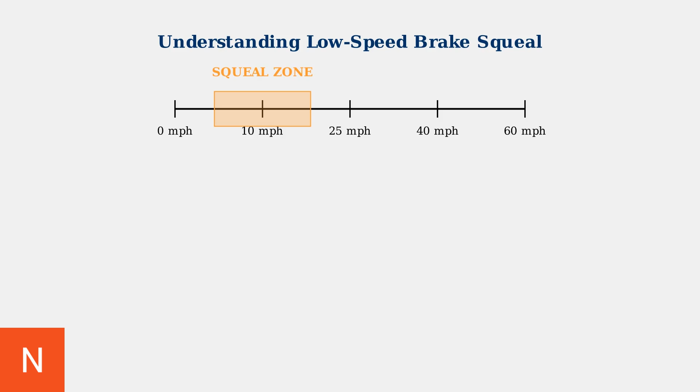Low-speed brake squeal is a common automotive issue that occurs primarily at speeds below 25 miles per hour. Understanding its causes is essential for effective diagnosis and repair. Brake squeal typically manifests in the low-speed range, particularly below 25 miles per hour. This is the critical zone where the conditions for squeal are most favorable.

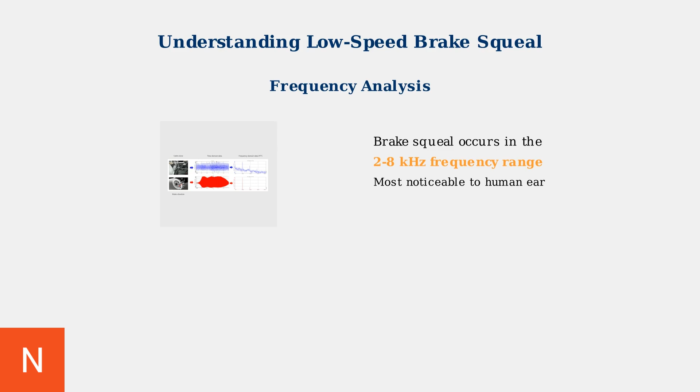The physics of brake squeal involves vibrations in the 2 to 8 kilohertz frequency range. This frequency band is particularly noticeable to the human ear, making brake squeal especially annoying to drivers. The primary cause of brake squeal is stick-slip friction. The brake pad intermittently sticks to the rotor surface, builds up tension, then suddenly slips. This repetitive cycle creates the characteristic vibration and noise.

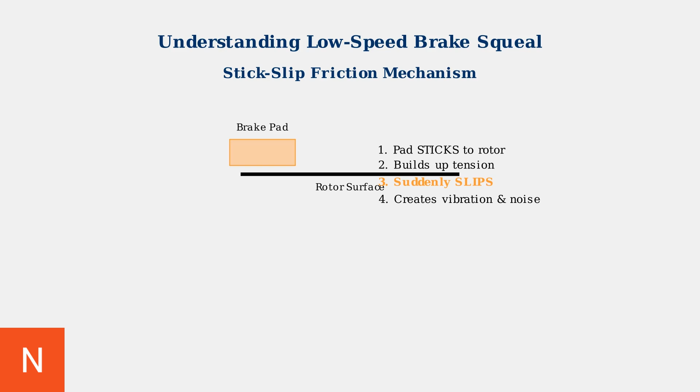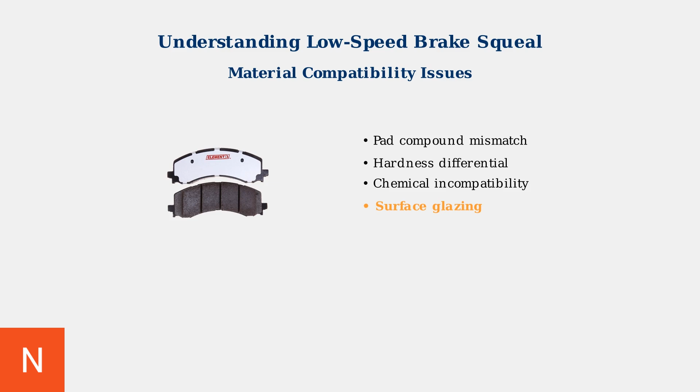Material incompatibility between brake pads and rotors is a major contributor to squeal. Mismatches in pad compounds, hardness differentials, and chemical incompatibility can lead to uneven contact patterns and surface glazing. Several mechanical factors contribute to brake squeal. Worn or improperly lubricated caliper slide pins, warped rotors, incorrect pad installation, and contaminated brake surfaces all create conditions favorable for noise generation.

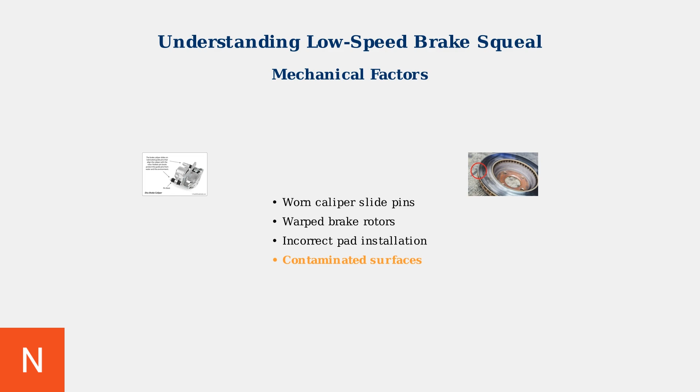Recent technological advances have revolutionized brake noise diagnosis. Digital brake noise analyzers provide precise frequency analysis, while thermal imaging cameras help identify hotspots and uneven heat distribution that contribute to squeal. Modern brake pad formulations, including ceramic metallic hybrid pads and nano-coating technologies, have achieved up to 40% reduction in low-speed squeal compared to traditional semi-metallic pads.

When brake squeal occurs, there are immediate fixes you can apply to resolve the problem quickly and effectively. The first immediate fix is thorough cleaning. Remove all contamination from both rotors and brake pads using brake cleaner to eliminate dirt, oil, and debris that cause squealing. Next, lightly sand any glazed surfaces on the brake pads. Glazing creates a smooth, shiny surface that reduces friction and causes noise. Light sanding restores the proper texture.

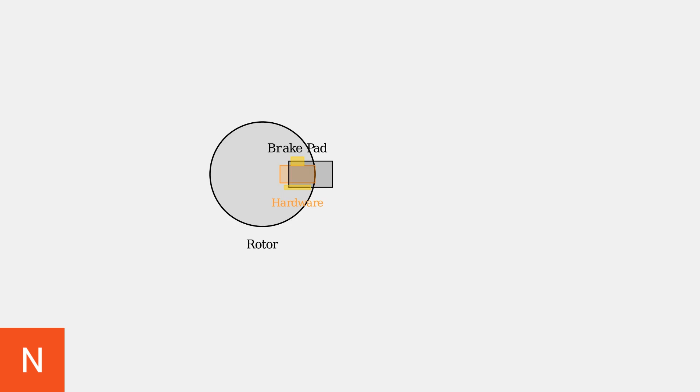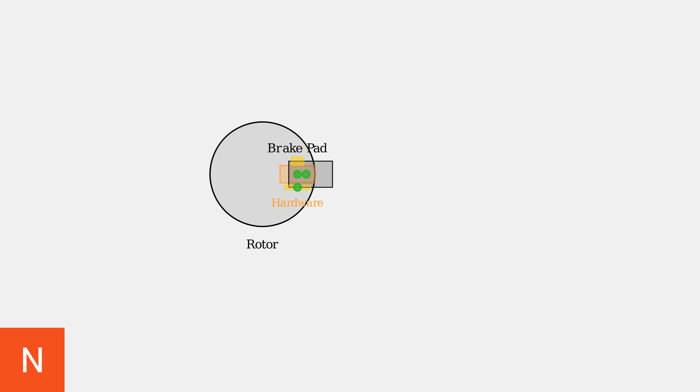Replace worn hardware components, including shims and clips. These small parts prevent vibration and are often overlooked, but critical for quiet operation. Apply high-temperature brake grease to contact points where metal components touch. This prevents vibration and reduces noise while withstanding brake system heat.

For long-term solutions, focus on component compatibility and quality upgrades that prevent future squealing problems. Ensure brake pad and rotor compatibility by matching materials and specifications. Mismatched components are a leading cause of brake noise and premature wear. Consider upgrading to premium brake components with noise-dampening features. Quality components cost more initially, but provide quieter operation and longer service life.

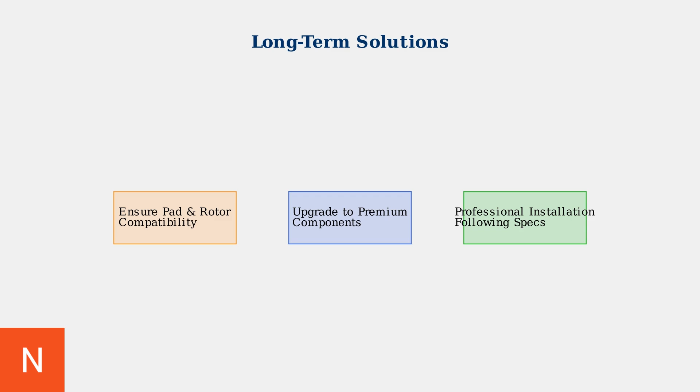Professional installation, following manufacturer torque specifications, is crucial. Improper installation accounts for 70% of brake noise issues, according to industry experts. Prevention strategies help avoid brake squeal problems before they start, saving time and money on repairs. Implement proper break-in procedures for new brake components. This involves gradual heating and cooling cycles that properly seat the pads against the rotors for optimal performance.

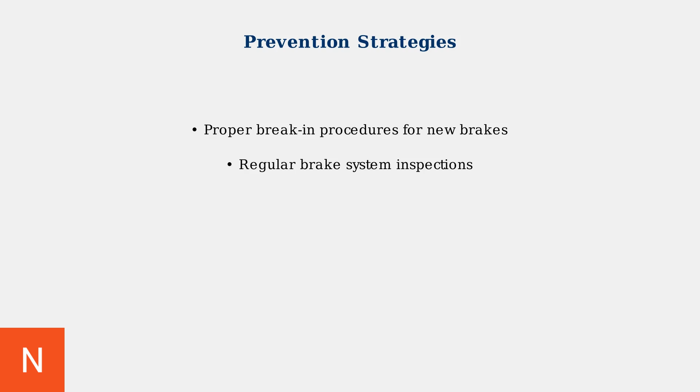Schedule regular brake system inspections to catch problems early. Visual inspection every 6 months can identify wear patterns and contamination before they cause noise. Educate drivers on proper braking techniques. Smooth, gradual braking reduces heat buildup and component stress that leads to squealing and premature wear. Protect brake components from environmental contamination by avoiding driving through deep water and cleaning brake dust regularly to maintain optimal performance.

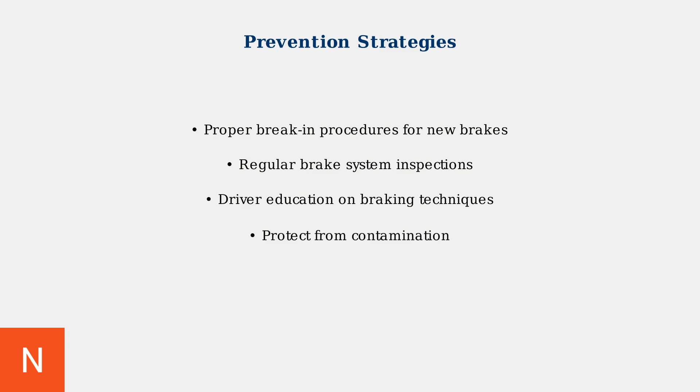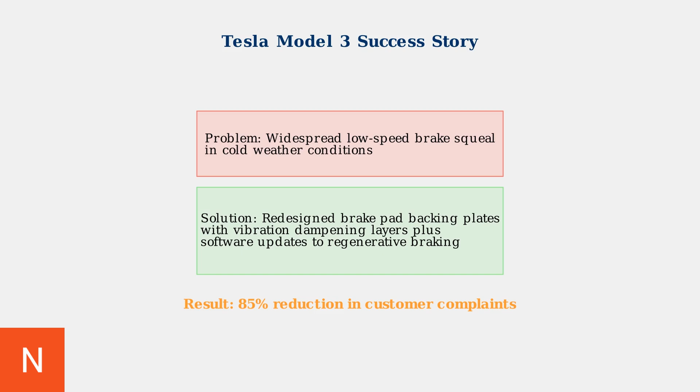Real-world success stories demonstrate these repair principles in action. Tesla's Model 3 brake squeal resolution shows how systematic approaches solve widespread problems. Tesla identified widespread brake squeal complaints in cold weather and implemented a comprehensive solution combining hardware redesign with software optimization, achieving an 85% reduction in customer complaints within 6 months.